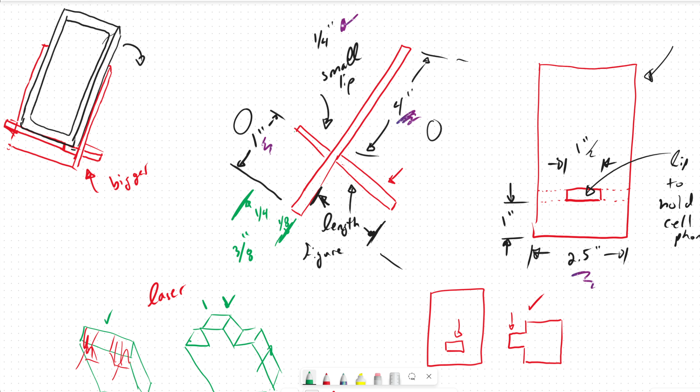All right, so we made a phone holder, and we got the holder leg and the front of the holder done in past videos. Just as a reminder, we're making this chair-looking thing here. So we're going to assemble it.

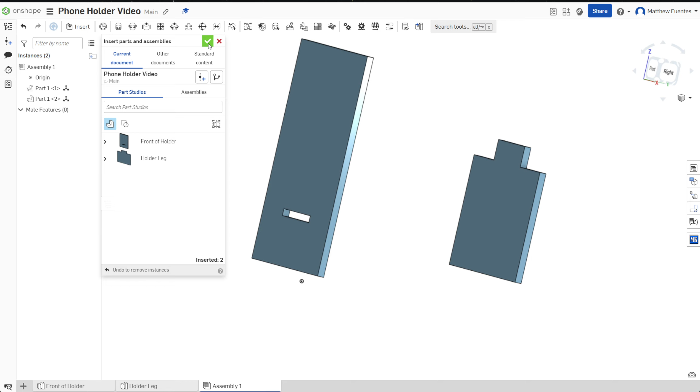Let's go ahead and do that. I'm going to go over to this assembly tab, click insert, front of holder, left click, then holder leg, throw it over here, left click. I'm going to click the check mark. If you click the X, they'll disappear, so I'm going to click the green check. Now I have two parts in here.

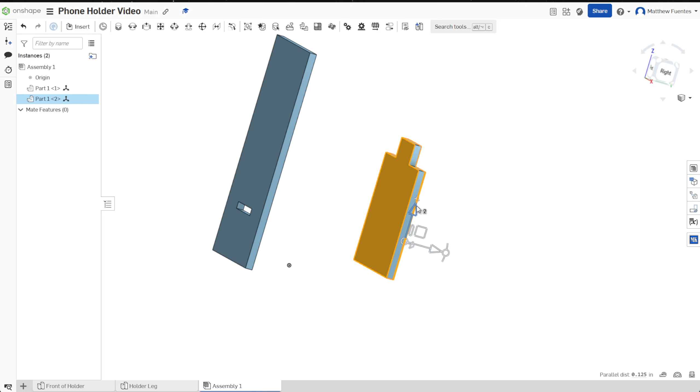So I can left click and drag them around and move them. Not super helpful. I'm going to kind of sort of line them up. I'll click on the parts, click on this little handle here and change the angle. Do I need to change the angle? I don't, but it's handy for me to start playing around and visualize what I'm going to do.

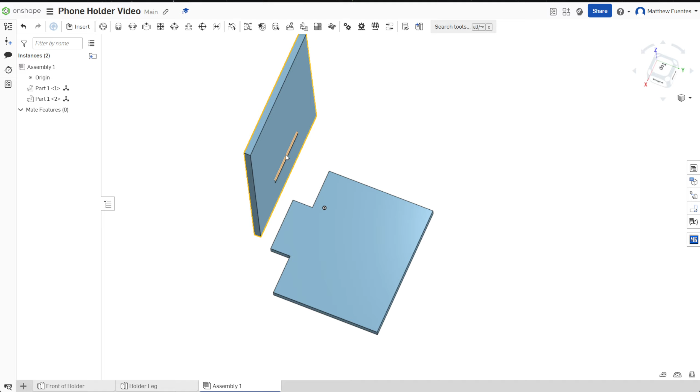We won't spend too much time dealing with mates. Mates can get a little complicated, and we're just getting started, but we'll explore it a bit here. We're going to do this using mates, and there's quite a few different ways to consider how to do the mate.

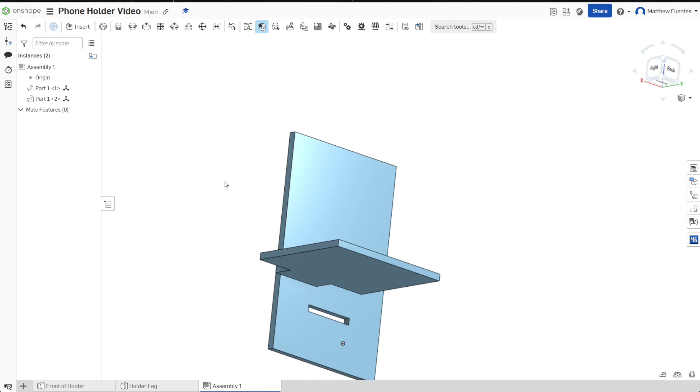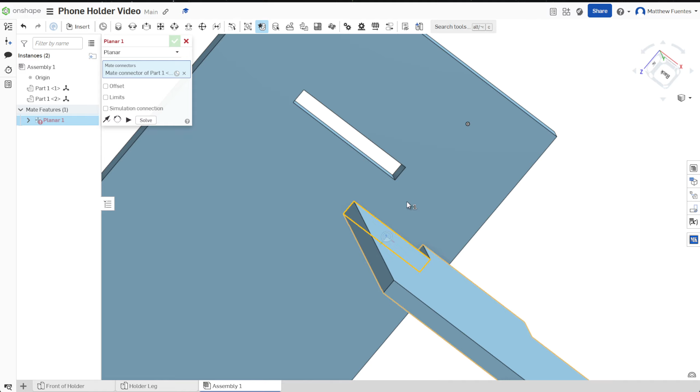We're going to use as simple as possible for now, this thing called planar mate. Basically this just allows two surfaces to be mated together on planes. So what I'm going to do is say first, I want the plane here to be mated with the back of my holder. I just clicked both of those.

You'll see that it just kind of jammed it through because it has no idea of physics. Keep in mind it's not detecting collisions, it's just doing whatever you tell it to do. So I'm going to click the green check. That looks absolutely terrible.

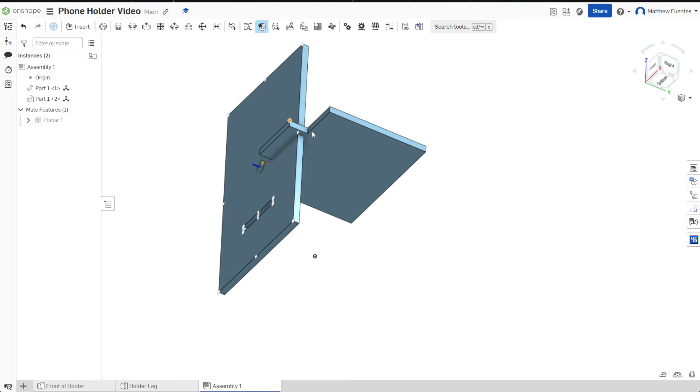If I X out of the planar mate, you can see that if I try to move things around, they move around, but this face down here always remains on the same plane as the back of the phone. That's great, but we need another constraint so that they mate up. So I'm going to do planar mates a couple more things.

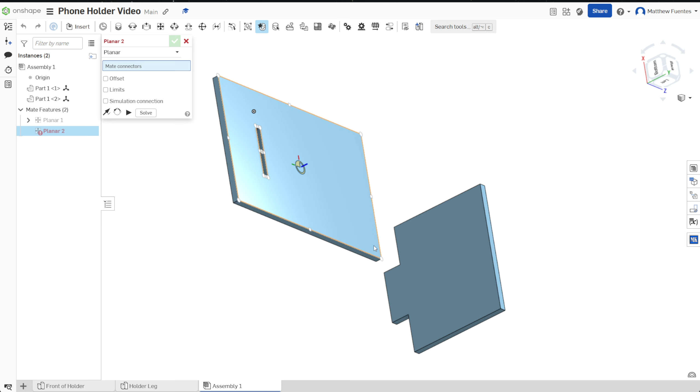I'm going to mate the bottom here. I'm going to hover over the whole thing, I want that plane to mate with the bottom of the slot. So I'm going to click in here. Boom.

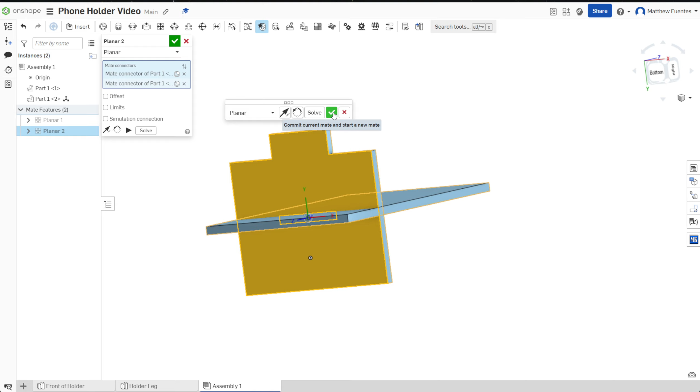That's not bad, I'm just going to click the green check. Until you click the green check and then you see, oh, that looks pretty good. But it's not quite there, right? So look what happens now. Oh, that's great, so it remains roughly in the slot.

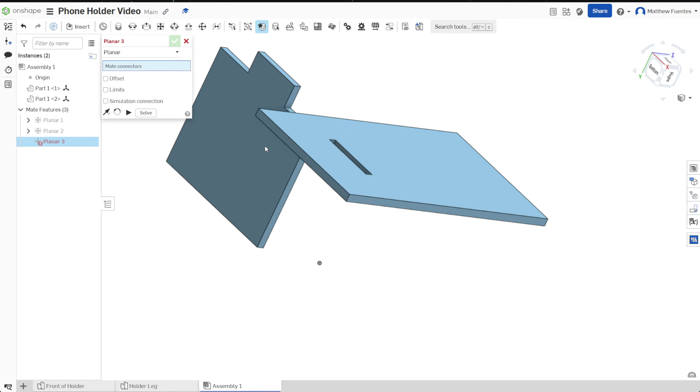So I'm left clicking on the part and dragging around. It's almost right, but it moves back and forth between places in the slot here. So what do I want? Well, I'm going to pick one of the sides here, one of the sides of the slot I want to be mated together. So let's do a planar mate.

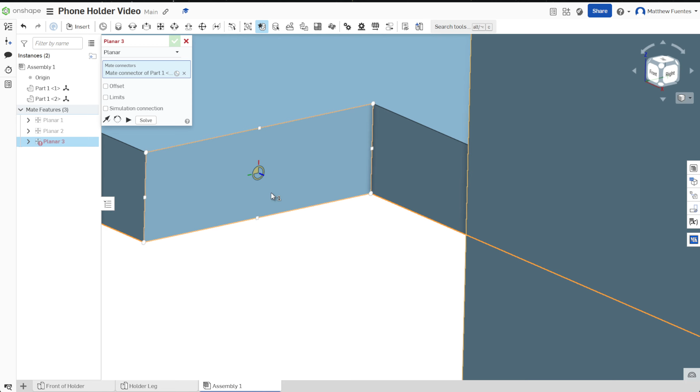Make sure we're in planar mate, and I see planar in here. So I'm going to do inside, and I'm going to pick the side. Make sure you zoom in with your scroll wheel. So side, and we'll see what that looks like.

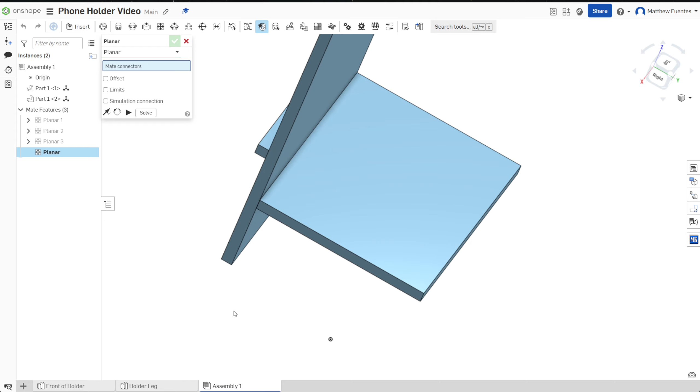Something that can give you a sneak preview of what it's going to look like is click solve, and it will give you a visual of what's happening in there. That looks pretty darn good, things look mated together. I'm going to click the green check. Cool, so that's not half bad.

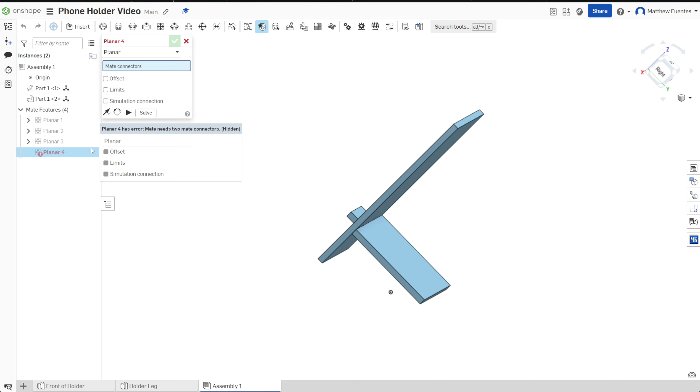And if I look at the side view here, I can see, wow, that's pretty darn good. We can add another mate, which we'll do maybe in a future video. It looks like I've got an error, oh, I need to click out of this, let me X out of this. There we go. In a future video we'll actually put a surface down here so you can play around with your different components to edit a little bit more. But that looks pretty darn good, so I'm going to go with it and we'll leave it there.